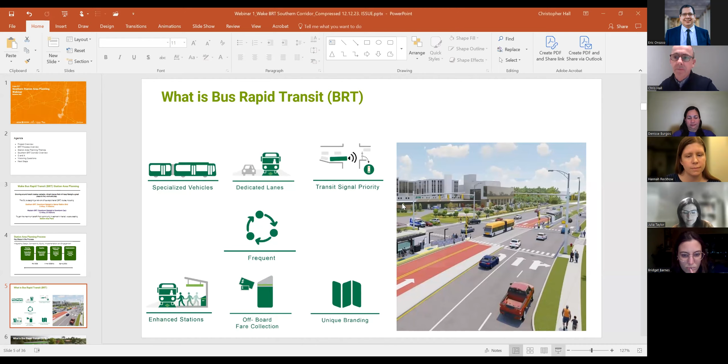Okay, we wanted to step back and maybe just give a little background on bus rapid transit itself. Many people are really familiar with the background to the bus rapid transit proposal, but every meeting we have, we always try and step back in case there's somebody who's less familiar who has just joined the process.

Sorry, I'm going to have to escape from this for a second. You can see my issue with this deck. Actually, Julia, can you pull up your version? Sure, why don't we do that? I'll just say next, which will be annoying, but let's do that one. I can see there's a glitch in my deck. That would be fine. Okay, so are we seeing the deck still? Next. Yeah, there we go. Okay, this one. Great, thank you. Thanks for your patience with that.

So we wanted to make sure everybody had the same level of information around bus rapid transit. What's distinctive about this, and why it has the potential for great benefit to communities and businesses along the Southern Corridor, is that this is a bus system which essentially allows people to move more quickly through the corridor and add transit capacity to the corridor as a whole.

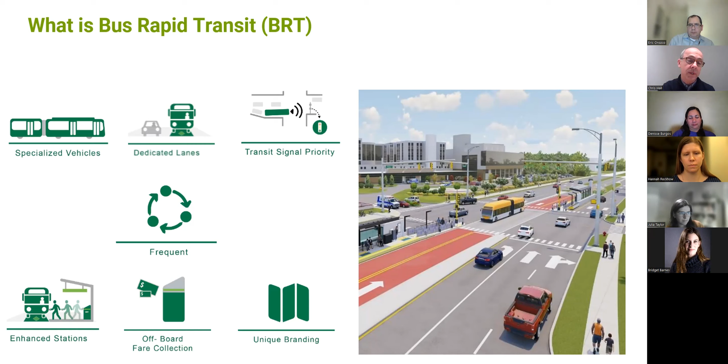They often travel in dedicated lanes for much of their journey, which means they're not held up by existing traffic. They can advance traffic signals so they can move forward more quickly. They also can offer more frequent service. The stations are significantly enhanced over regular curbside poles and signs, and there's the potential that you can pay the fare before you get on. All of this means the vehicles can move much more quickly and carry many more people in a higher quality transit experience.

And there are wider benefits to this. It really is about connecting members of the community to jobs. But it's not only commuting, it's also about accessing education resources. It could be health, it could be shopping, all of the things that people need to access in their daily lives.

It also means that people are less dependent on their cars, that they can walk to bus rapid transit, they can bike to it, and then move around the city in that way. It means the immediate areas around stations can be less car dependent, that people can move without cars and also save money by not having the cost of vehicles. That can also improve air quality and contribute to sustainability goals.

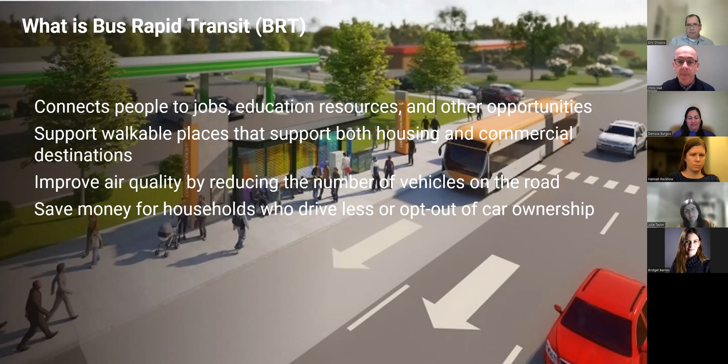The background is that there are two corridors being looked at the same time: Western Boulevard and also the Southern Corridor from downtown Raleigh to Garner. This process is looking at station area planning.

There's a parallel process looking at the engineering design of BRT, but this group is really looking at the potential benefit that could be gained in station areas. Station areas are that 5 and 10-minute walk around where the future BRT stations would be. We're interested in first and last mile mobility, how people can get around, land use and urban design considerations, and the potential future shape of any new development, how we can support existing businesses and make sure there's benefit to them in the future.

Also looking at housing questions, both affordability issues, access to affordable housing, and addressing any displacement considerations. And as we go through this, looking to be as open and equitable in the engagement process as we can be.

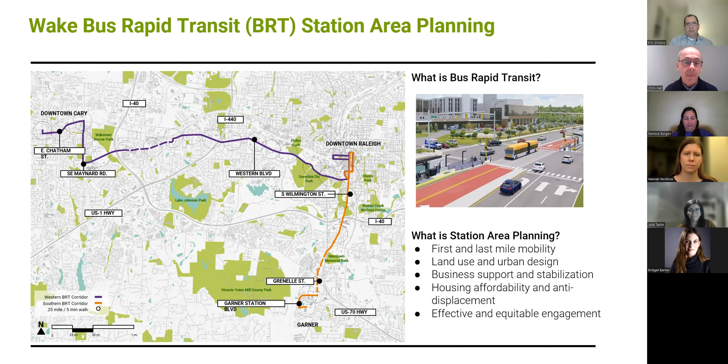So how do we get here? That's the system. Those are the routes we're looking at.

So the big picture here: Raleigh and the region are just growing. It's been almost exponential over the last 20 years, the rate of growth. With many more people coming into the region and into the city, we're looking to find ways that we can move people around more effectively.

As the city is growing, that's driving residential growth and business growth, and it also has impacts in terms of the housing market and puts pressure on the market in some ways. It has been increasing rent values and sales values, but that's all part of the context of the city being one of the second fastest growing metro areas in the country. So a very rapid rate of growth, which we have to accommodate.

This is from some work done a few years ago, the Wake County Transit Plan. If you do the squint test, these colors are basically showing you where the densest activity is right now, a combination of jobs and housing. The lighter colors are where there's less dense activity. That's the way it was in 2017.

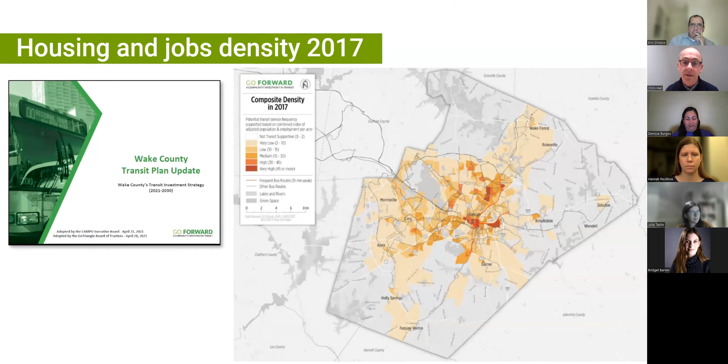This is a projection of the level of congestion and which locations would have congestion in the future too. So growth is coming, likely to be focused in certain areas, and this is the projection of how it would impact traffic congestion.

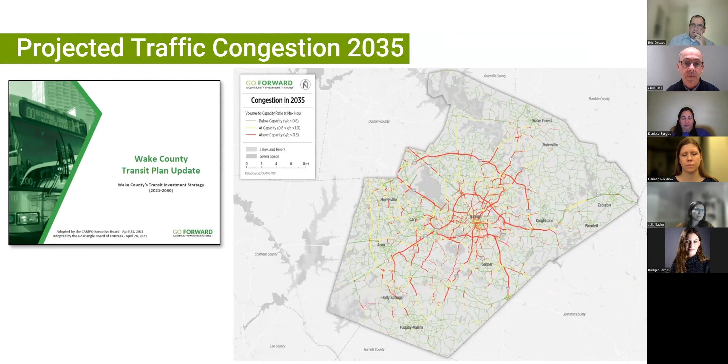So the big choice was, how should the region grow? How should Raleigh grow? The choice has been made to grow more around transit instead of growing more around driving. That's the choice driving the decision to invest in bus rapid transit, which is now leading to this investigation of what it means to grow more around transit instead of around driving.

Quick reminder, this is the corridor we're looking at. This shows the connection from downtown, past Shaw University, heading south down Wilmington, then making a connection through some shopping districts around Chapel Oak Square, and heading down to Garner Station, around North South Station. That's the alignment as it's kind of set right now.

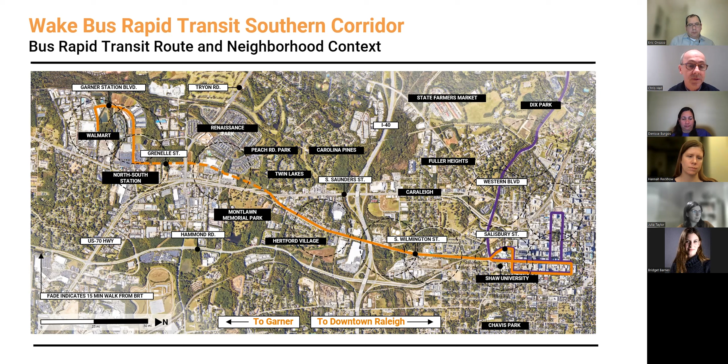There's a next round of engineering beginning in the next couple of months, which will do due diligence around some of these details. But we're also looking at the potential station locations, which you can see with the dotted circles. There are a number of locations along this corridor where new stations and new transportation facilities may start to shift some of the land uses or generate new opportunities for investment.

As we walk into the process of station area planning, we want to bring certain themes to the table, and it'd be great to hear what themes you think are important. But these are the ones we've been working on so far.

Stronger mobility across station areas, meaning walking, biking, recreational movement as well. So it's not just for commuting, but actually to get exercise for health purposes. We also want to make sure it's an accessible station area, so that people with different levels of personal mobility are still able to get around effectively.

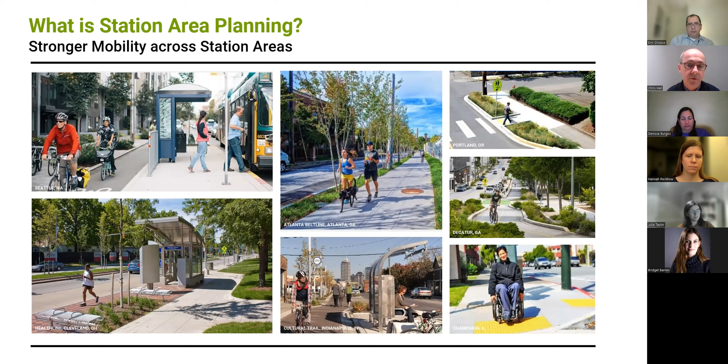We're looking at a diversity of development, meaning different uses and activities: housing, but different types and scales of housing, as well as affordable housing, and other kinds of uses such as potential for retail, potential for hotel, and employment uses and activities too.

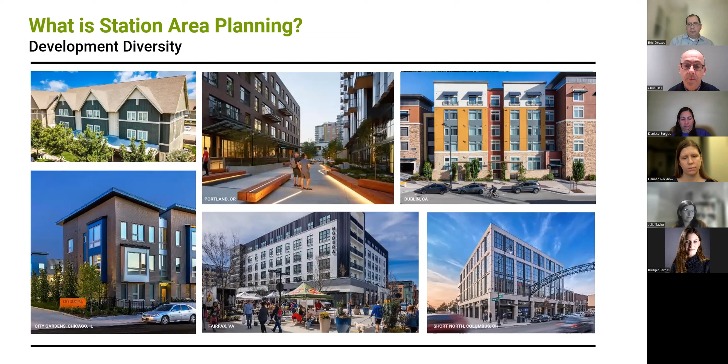We want to have really active streets and public spaces, a network of spaces that people can use, enjoy, meet, and really looking at streets as being high quality places as well. Streets should be attractive, should be kind of destinations in their own right.

We're also looking at equity, and this is often most obviously about housing, making sure that there is housing for the broadest range of incomes as possible. But equity is also about jobs, accessing jobs, providing jobs within corridors. It's also about community services, so we want to make sure that there are places for all of those elements in the conversation.

And then also sustainable landscapes. This is a great way to kind of restore natural systems, invest in habitat, but also create really attractive places too. So a wide range of landscape types or interventions which can work at the level of individual homes, but also can be how we address streets and public spaces.

And as we go through this process, we're encouraging people to tell us what they think is important too. So what would you like to see more of in your neighborhood, where you live, where you work, maybe where you're part of an institution within the corridor. Looking at entertainment, places to eat, shopping options, housing choices, job opportunities, city amenities like libraries or other kinds of services, but then also the range of public spaces, sustainable spaces, or trails that you would like to see. So all of these are on the table, and other things maybe as well. It'd be great if you let us know which of these you think are important, and then also other things that you think could come into the corridor.

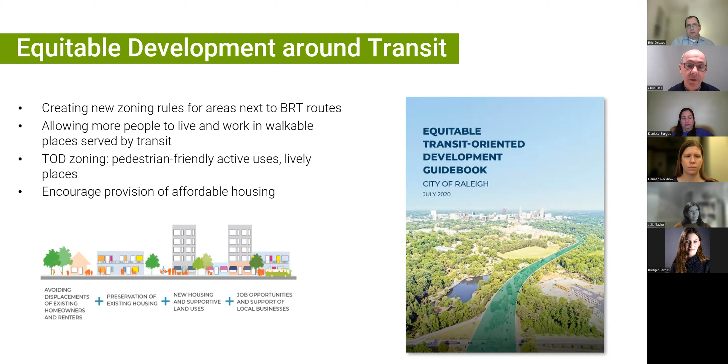And there are some particular locations that were designated with an overlay, and these are locations where if there is development which is a little taller than the existing base zoning, there is the requirement to provide affordable housing. So it's really an incentive, people can build taller, but within that taller development, there has to be an affordable housing provision.

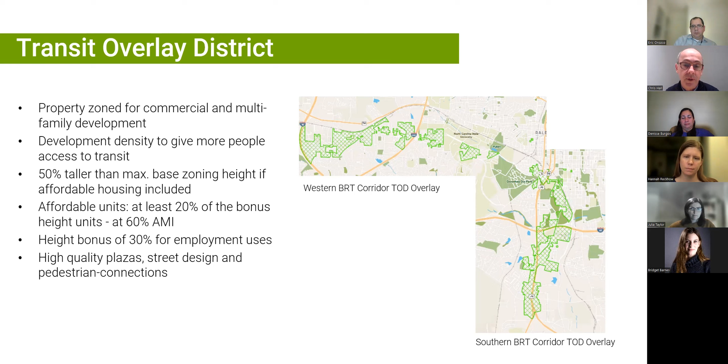And then there's a range of housing tools and programs that exist today. But part of this process is also to explore are there other tools that can support affordable housing within this corridor and be generally applicable within Raleigh. So we're doing something of a review as part of this process to understand what other tools could be brought to bear to add to this menu of resources. I think it's important these resources are available to address existing affordable housing, naturally occurring affordable housing that's out there within the marketplace, as well as to support new affordable housing.

So I think we just want to do a quick skim over a couple of maps, and then we can get into a conversation. We wanted to do a quick overview tour in a little more detail of what's included.

And these maps are kind of focusing on connectivity. So where are the existing transit connections? Where are the bike connections? Where are the trails? But also what's in existing plans today. So we're looking at maybe a picture of what the world could look like in 5 or 10 years' time, but we want to understand what else is needed.

This is the time to think about specifically how do we connect to station areas and improve connections within those station areas. You can see here, this is the segment from Shaw University extending south from downtown through a couple of proposed stations, and then kind of heading south.

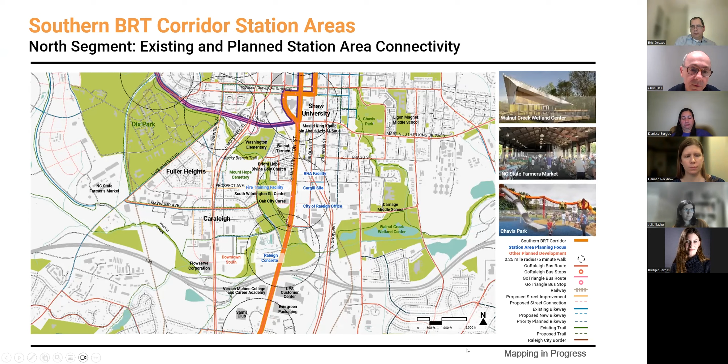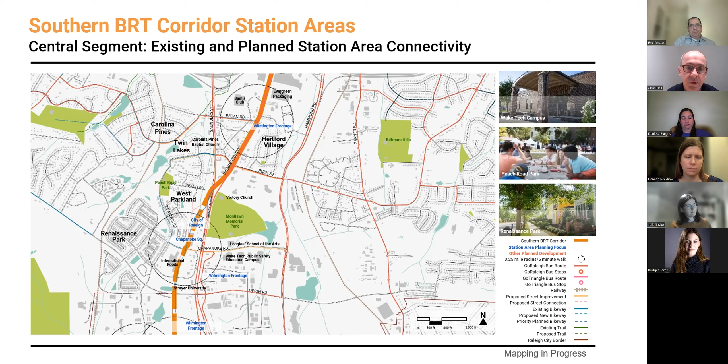And then you can see how the route comes down Wilmington, and then the proposal, which is subject to due diligence this year and further rounds of engineering study, comes through Chapanoke Square, past International Foods, and then down to Garner Station. I think you can see here, there were a lot of connections close to downtown, but as you move further south into areas that were previously industrial and maybe a little more suburban today, the number of bike and pedestrian connections and trails really falls away. There's quite a rich network close to downtown and connecting the existing parks, but as you move south, there are fewer of them.

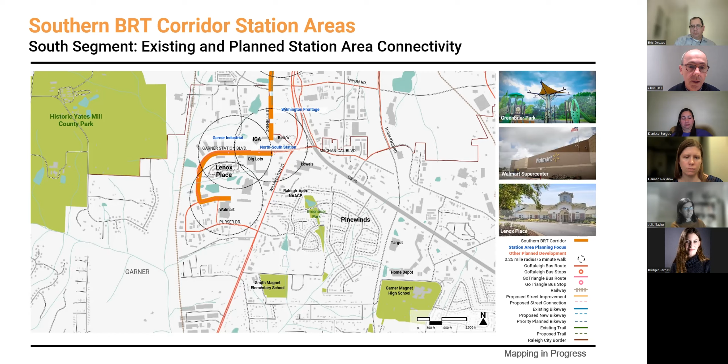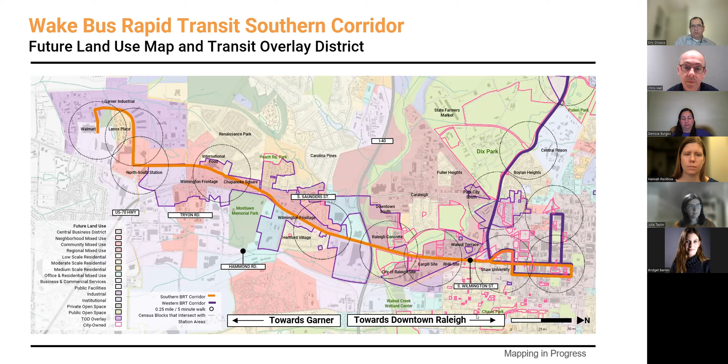So yeah, I think we wanted to open it up, and Julia, do you want to take us through this, really just to open it up and see if people have any questions for us before we get into some of the questions that we're interested in?

Yes, it looks like John McCann has raised his hand. John, did you want to type your question or voice your question? Sure, I'll go ahead and voice it. Okay, thank you for the presentation. Certainly a presentation like this is supposed to accentuate the positives, but could you point out some of the downsides of this undertaking?

Interesting question, interesting way of putting it. We're seeing fewer downsides, but we acknowledge challenges. Among the challenges we want to take on is how people can effectively move around and walk and bike from different parts of the corridor, so they can get to all the assets and resources, but also get to transit itself. There are a lot of big highways, and there are historic and large-footprint industrial uses, so it's not always easy to get around. That's a challenge we want to help overcome.

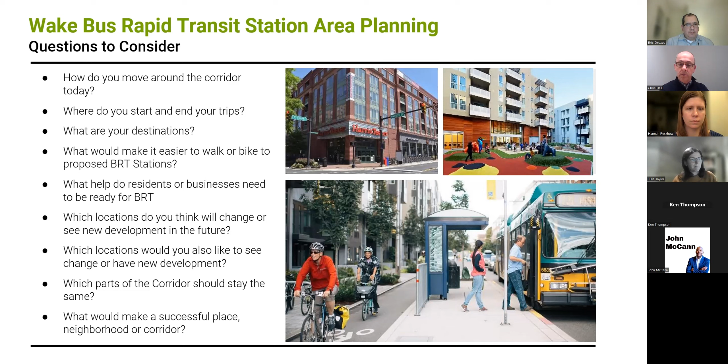So really understanding all of those things, and then our baselining activities, understanding physical conditions, but also market analysis too.

So our team is looking at housing, retail, office, and industrial conditions through the area, what's happening with new investments, what the rent and value trends have been. Are there affordability issues? Where are they concentrated? Demographics in terms of household income, so how all that fits together to see if there's an affordability gap. That's all happening right now, as well as real investigation of physical conditions, sidewalks, streets, bikeways. What's the network? How's it all fit together?

That's really leading us to begin the station area planning. It's an options phase, to understand what the alternatives and options may be, so that we can bring those back to you in a few months' time. Then once we have feedback, it will lead to more specific recommendations, some choices, and really looking at implementation. How do we get some of these goals achieved? Obviously the role of city government, but then what's the role of private sector, nonprofits, and others in the process?